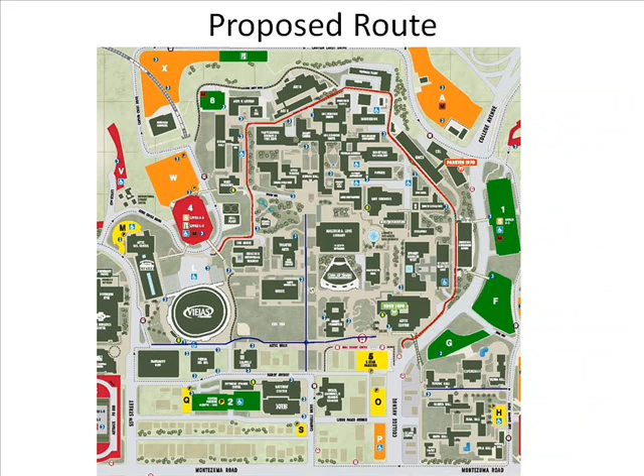The Highway Design Manual Class 2 bikeway is represented by the red route, where bicyclists and motorists will share the roadway, which goes through AZTEC Circle Drive, Avenue of Arts, and Scripps Terrace. The blue route represents the Highway Design Manual Class 1 bikeway, which will be exclusive to bicyclists and skateboarders only. This route is adjacent to the dorms and travels through AZTEC Walkway and Campanile Way.

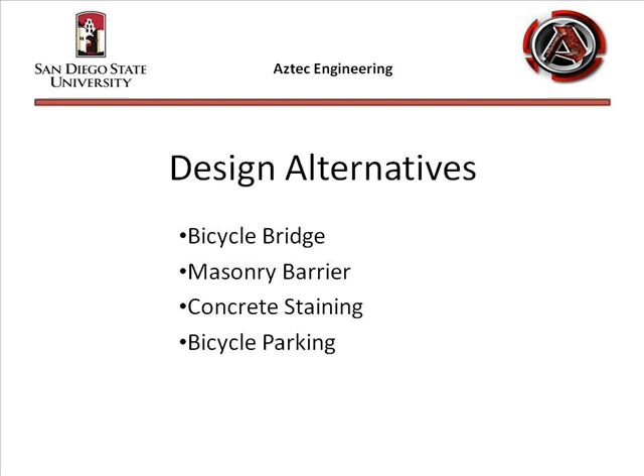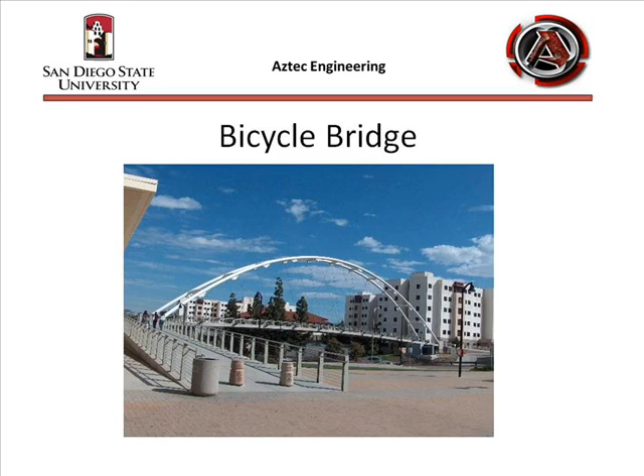Alternatives considered by the design team included a bicycle bridge, a masonry barrier, concrete staining, and additional bicycle parking. Presently, there is no safe and efficient manner for bicyclists living at the college dormitories to traverse College Avenue in order to get to campus. Therefore, a bridge designated for bicyclists was considered as a possible solution.

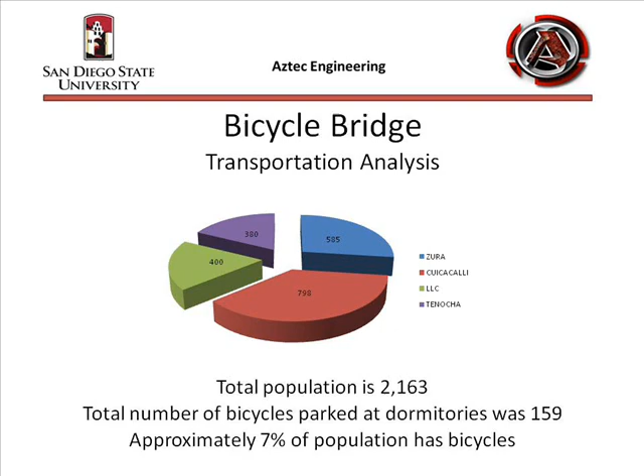Currently, the total population residing at the dormitories is approximately 2,163. A field count of the number of bicycles at the dorm determined the number of potential bicyclists to be approximately 159. That only accounts for approximately 7% of the total population at the dormitories.

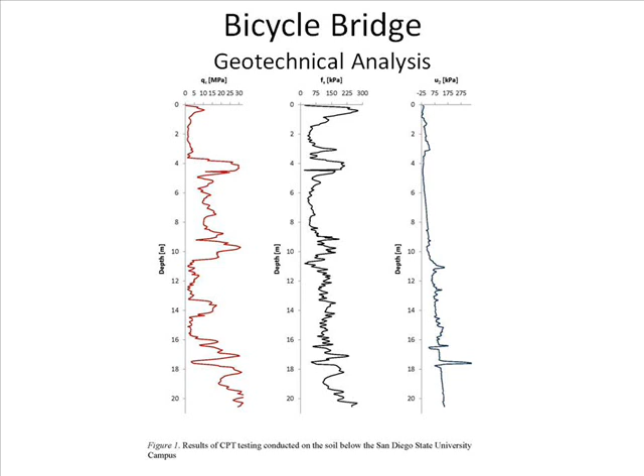Based upon soil data analysis provided to AZTEC Engineering by the school architect, which included the results of a CPT test, we were able to classify soil type for each layer. The following profile determined 9 different soil layers and the water table that is located at 3 meters below the surface.

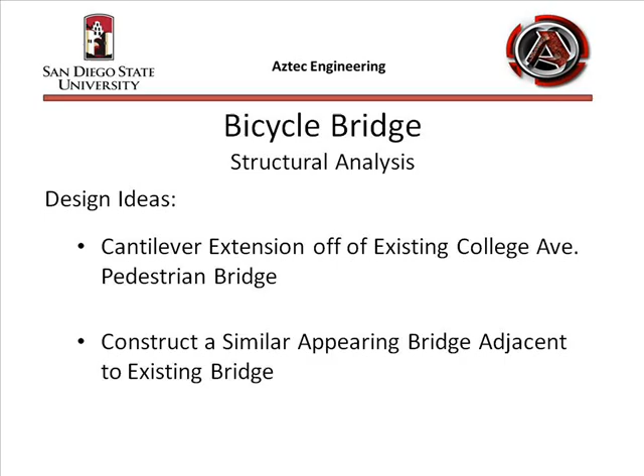Two design ideas considered by the design team included a cantilever extension off of the existing suspension bridge over College Avenue adjacent to the dormitories, and a second idea was to construct a separate but similar bridge exclusively for bicyclists adjacent to the existing suspension bridge.

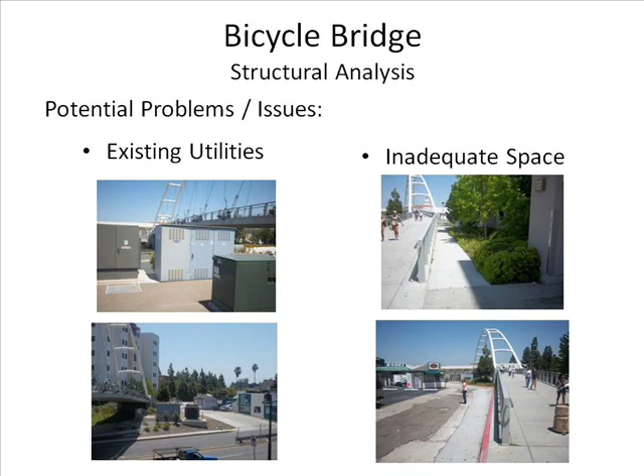Potential problems existed with both design ideas. There are 3 large electrical cabinets present that could make the construction of formwork quite difficult, and due to its proximity to Cuicacalli Dormitory and the alley behind KB Books, there is inadequate space for a parallel bridge. An additional issue were existing stairs that service the bridge.

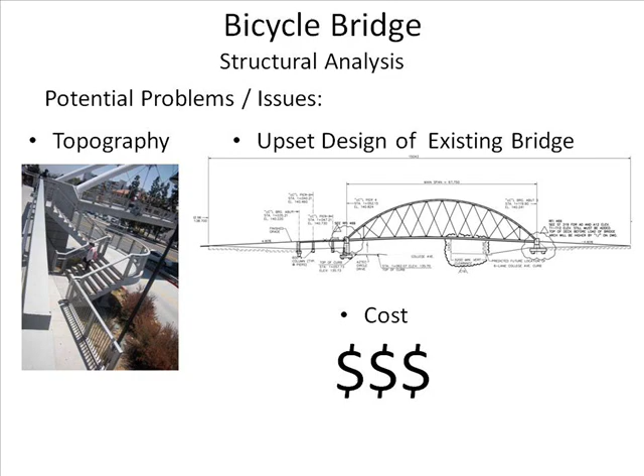Both designs would have required the demolition of these stairs. The cantilever idea would have resulted in upsetting the current design and loads for the existing bridge. Most of all, cost of a bridge for exclusive use by bicyclists was a concern. Due to the high cost of construction, low bicycle demand use, and problems with existing features, AZTEC Engineering made the decision to abandon the design.

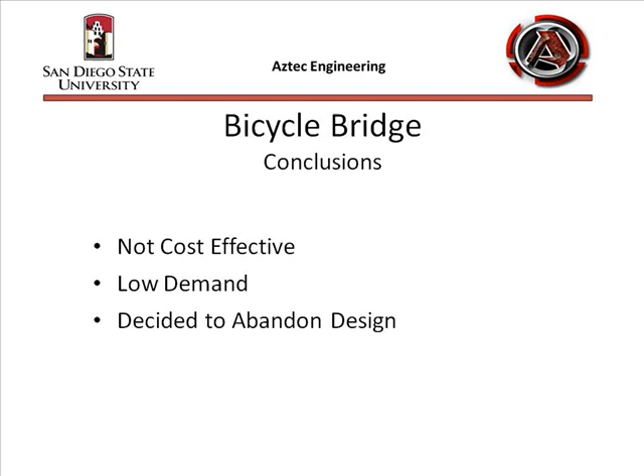The most important aspect of our design was to ensure the safety of all students, including pedestrians, bicyclists, and skateboarders. To achieve our goal of safety, AZTEC Engineering decided on a 4-foot-high masonry wall to separate pedestrians from bicyclists and skateboarders along Campanile Way.

The initial task completed by the design team was to determine the amount and makeup of the traffic flowing into the campus via Campanile Way. The purpose of the study was to determine the peak hour volumes and percentage of pedestrians, bicyclists, skateboarders, and vehicles entering Campanile Way. In order to complete this task, members of the team conducted surveys at various locations providing access to Campanile Way, which included AZTEC Walk, Open Air Theater, the Music Building, Hilltop Way, and the Love Library.

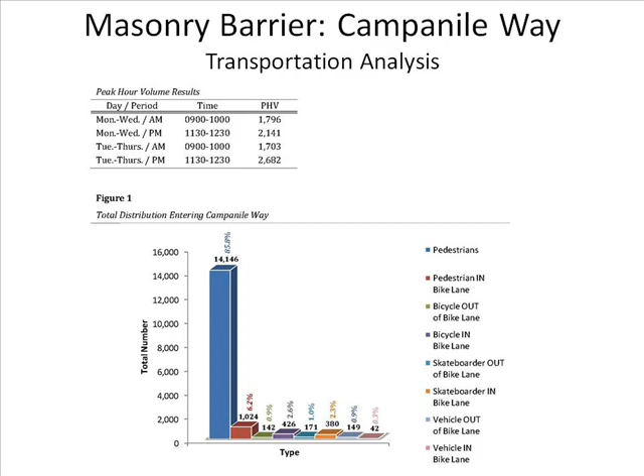The surveys were conducted between the hours of 0845 to 1500 hours. The results of the survey indicate that the majority of the traffic entering Campanile Way were pedestrians. On all days, pedestrians accounted for over 91% of all traffic, while bicyclists and skateboarders each accounted for over 3% of all traffic. Vehicles, which included carts, automobiles, and trucks, accounted for the remaining traffic. Nearly all the bicyclists and skateboarders and about 5% of the pedestrians were utilizing the existing bicycle lane.

According to code requirements, all footings must extend at least 12 inches into undisturbed natural soil or compacted soil which has been compacted to 90% density. Masonry units should be medium weight units with maximum shrinkage of 0.06%, F'(m) of 1500 psi. All head and bed joints should be 3/8 of an inch thick.

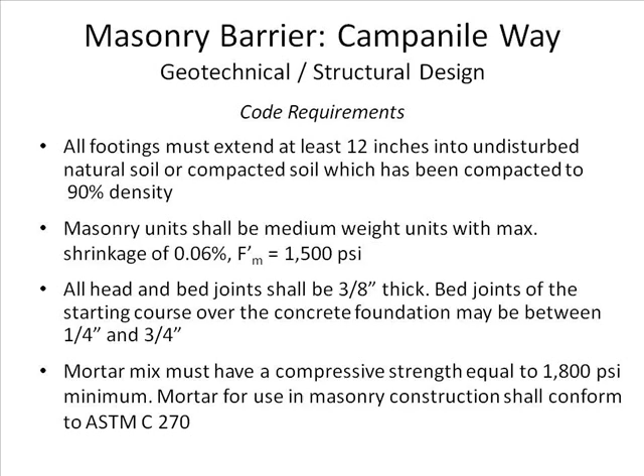Bed joints of the starting course over the concrete foundation may be between 1/4 to 3/4 of an inch. Mortar mix must have a compressive strength equal to 1800 psi minimum. Mortar for use in masonry construction should conform to ASTM C270. Grout must have a compressive strength equal to 2000 psi minimum.

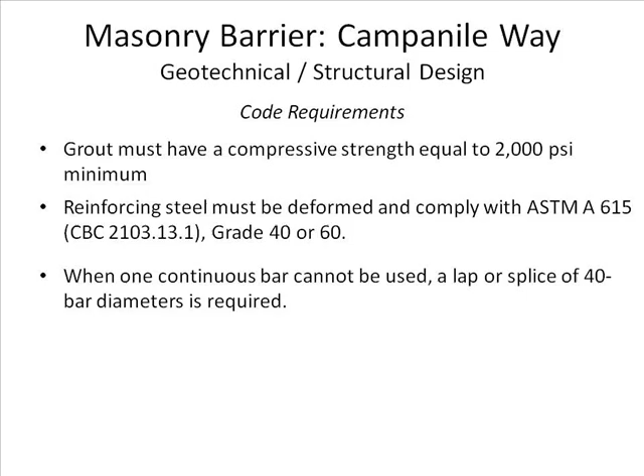Reinforcing steel must be deformed and comply with ASTM A615, grade 40 or 60. When one continuous bar cannot be used, a lap or splice of 40 bar diameters is required.

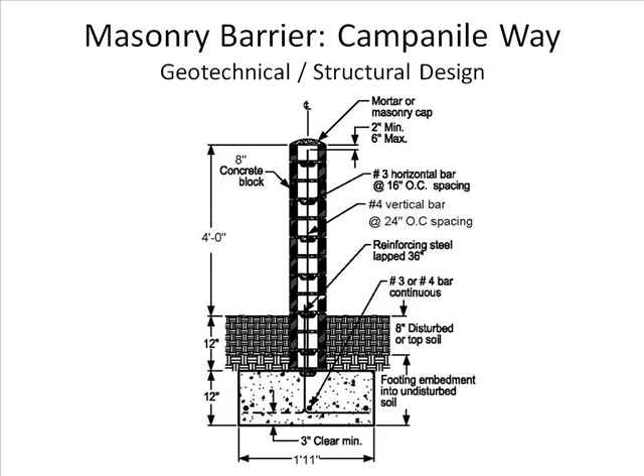The following detail was generated based upon the San Diego City Code, ASTM criteria and design calculations. Utilizing 8 inches fully grouted medium weight masonry block, the required horizontal reinforcement was number 3 bars at 16 inches on center. The vertical reinforcement required was number 4 bars at 24 inches on center.

The masonry wall designed to enclose the bicycle path will consist of a 4-foot-high wall on each side of the path along the Campanile Way route. The 625-foot wall is broken into 6 sections to allow for pedestrian traffic to cross the path.

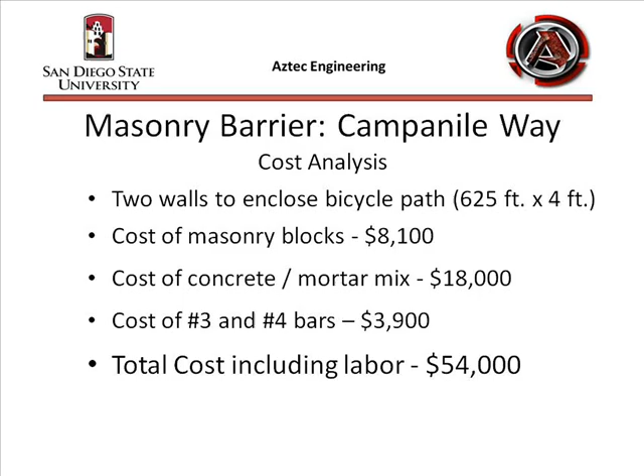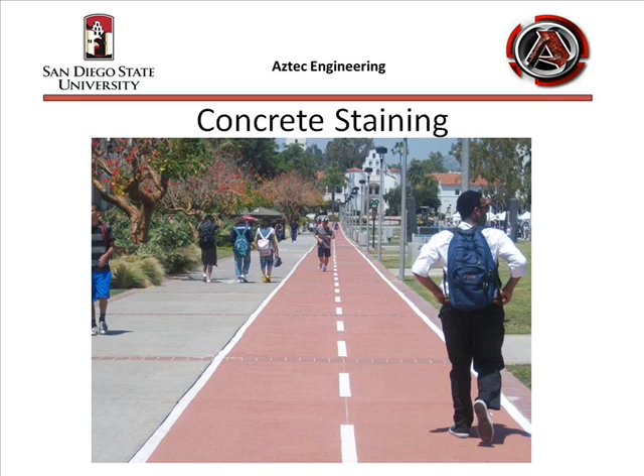To establish Class 1 bikeways, the design team determined the most economical and safe design would be to stain existing concrete, supplemented with striping and signs. The concrete staining design will be based off the criteria in the Highway Design Manual for Class 1 bikeways. The stain will be a water-based polymer stain in Baja Red.

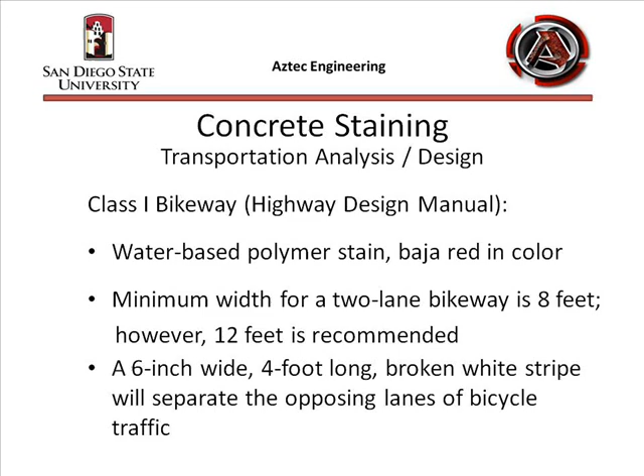There will be a minimum width for a 2-lane bikeway of 8 feet. However, 12 feet is recommended in the manual. A 6-inch wide by 4-foot long broken white stripe will separate the opposing lanes of bicycle traffic.

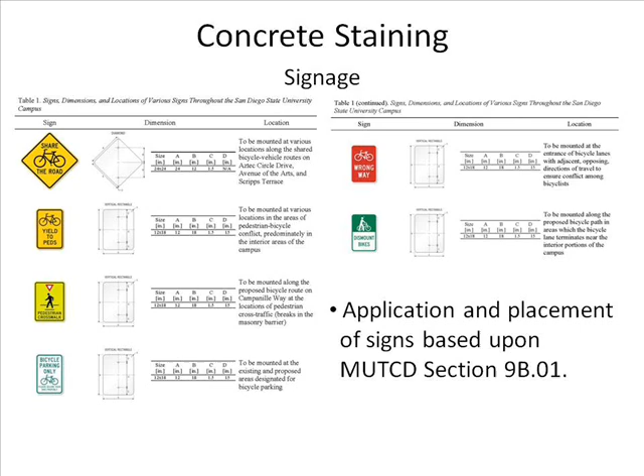Application and placement of signs were based upon the MUTCD Section 9B.01. For example, the Share the Road sign will be mounted at various locations along the shared bicycle vehicle routes on AZTEC Circle Drive, Avenue of the Arts, and Scripps Terrace.

The total area of the path to be stained is approximately 18,600 square feet. The white paint, Baja Red stain, and stain sealer accounts for a $2,200 material cost.

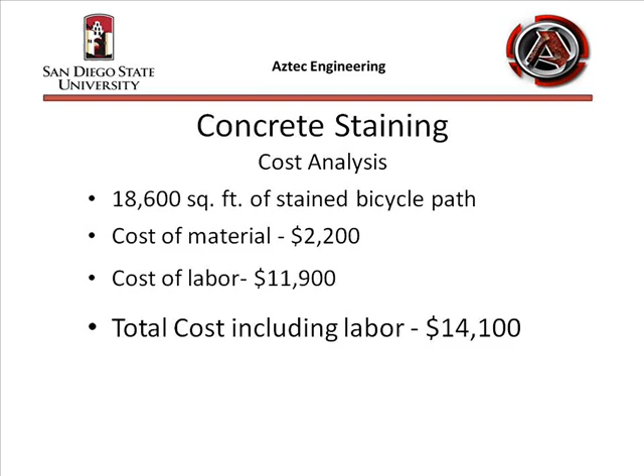The labor for applying the stains will require a 4-man crew and 9 full working days to allow for the pressure washing of the path, the application of the stain and sealer, and appropriate drying times. The cost for the 9 days of labor is $11,900, for a total concrete staining cost of $14,100.

One issue observed during observations made on campus was the lack of parking for bicyclists. The blue stars represent the locations of existing bicycle parking, which include inverted U's, waves, racks, and a bicycle barn. The red stars represent areas around the dormitories in which additional bicycle parking is needed.

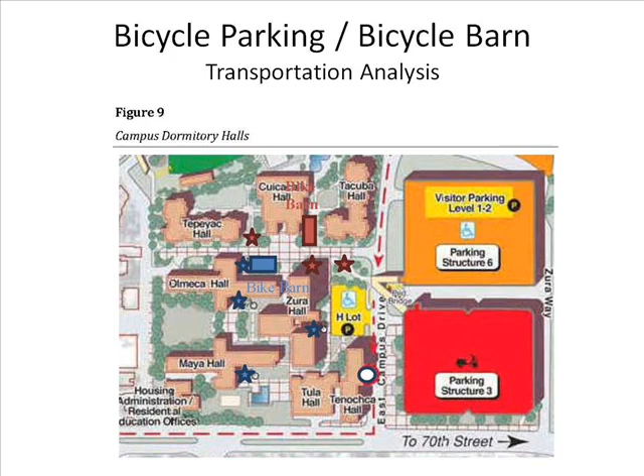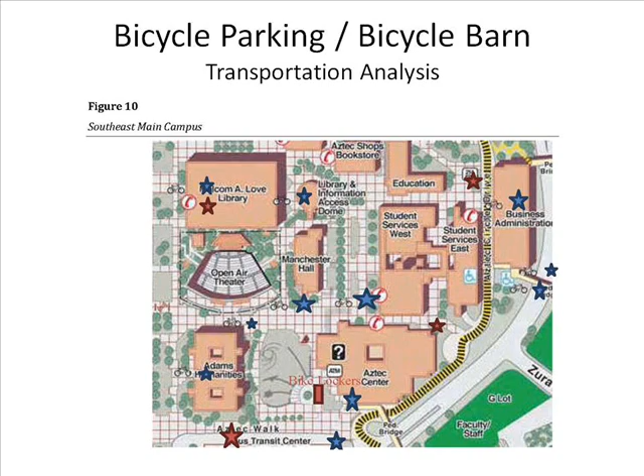The red rectangle represents the location of a proposed 160 capacity bicycle barn that will be free of charge to residents of the dormitories. The red rectangle depicted on the west side of AZTEC Center is the location of a proposed 12 bicycle lockers. Each locker is capable of holding 1 bicycle, and there will be a fee associated with the rental of the locker.

Depicted here are locations of the existing and proposed bicycle parking for the North Main campus.

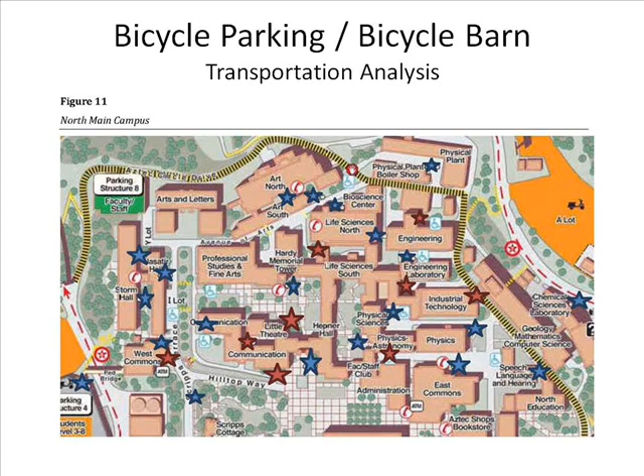One proposed type of bicycle parking is the inverted U. The criteria used in determining that the inverted U rack was most adequate is as follows.

It supports the frame of the bicycle and not just one wheel. It allows the frame and one wheel to be locked to the rack when both wheels are left on the bike. It allows the frame and both wheels to be locked to the rack if the front wheel is removed. It will allow the use of either a cable or U-shaped lock.

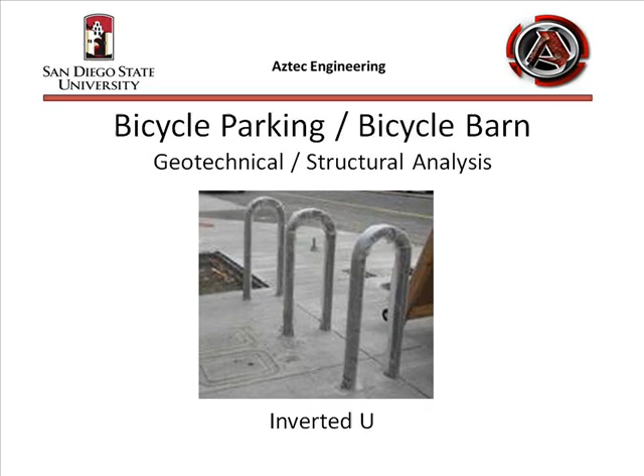It will be securely anchored to the ground. It will be usable by bikes with no kickstand. It will be usable by bikes with water bottle cages. And finally, it will be usable by a wide variety of sizes and types of bicycles.

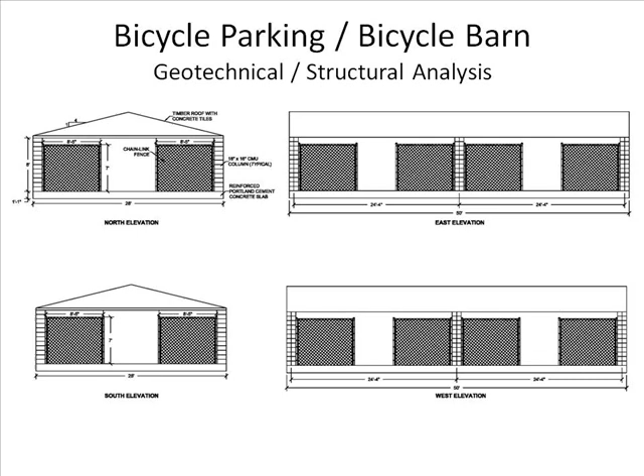The proposed 5-inch slab on-grade bicycle barn will be 28 feet by 50 feet and located adjacent to Queequeg Dormitory. The wood-framed roof truss will be supported by 6 8-foot-high masonry columns. To minimize cost and bearing load, chain-link fence was used as walls.

The following codes were adhered to when designing the bicycle barn. A minimum footing depth below natural and finished grade shall be 24 inches. Slab on grade and footings must be a monolithic pour. Footings reinforced with 4 number 4 continuous steel bars. 2 bars shall be placed within 4 inches of the top of the footing.

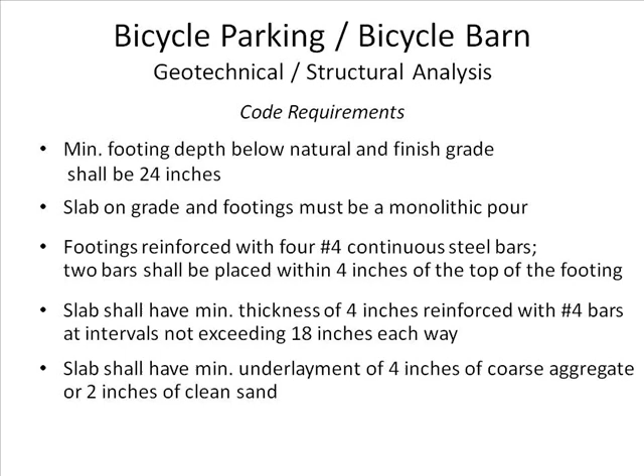Slab shall have a minimum thickness of 4 inches reinforced with number 4 bars at intervals not exceeding 18 inches in each way. Slab shall have minimum underlayment of 4 inches of coarse aggregate or 2 inches of clean sand. A 6 mil minimum moisture barrier is required beneath the slab underlayment and properly lapped at joints.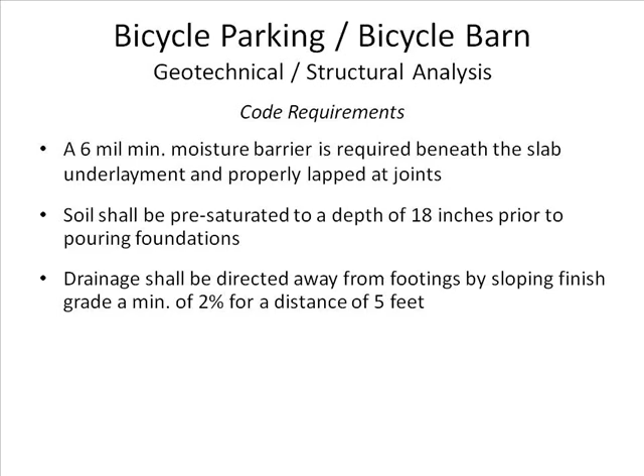Soil shall be pre-saturated to a depth of 18 inches prior to pouring foundations. Drainage shall be directed away from footings by sloping finished grade a minimum of 2% for a distance of 5 feet.

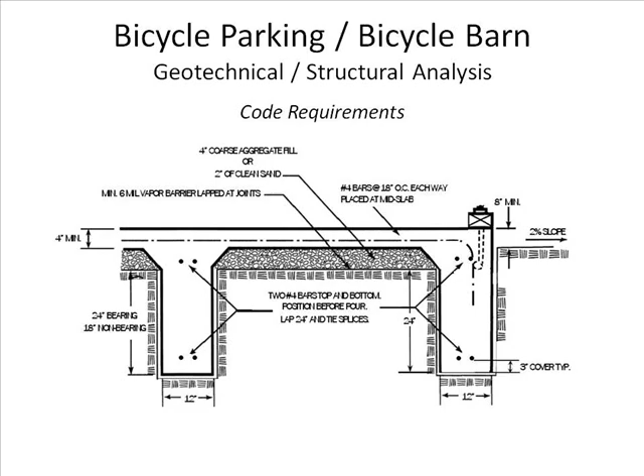The following detail depicts the design of the slab on grade for the bicycle barn. There will be 2 footings running longitudinally along the 50-foot length of the slab. The footings will be 1 foot by 1 foot and 2 feet deep to support the load from the columns and roof.

To account for the excess of bicycles to parking storage spaces, an additional 36 bicycle racks must be included across the campus. The cost of these additional racks is $2,630.

The 28-foot by 50-foot bicycle storage barn, built with 6 masonry block column supports, a brick facade, a wooden and galvanized steel panel roof, and chain link fencing and door, will have a materials cost of $15,750. Including labor for the construction of the storage barn and necessary bicycle racks, the total cost comes to approximately $40,000.

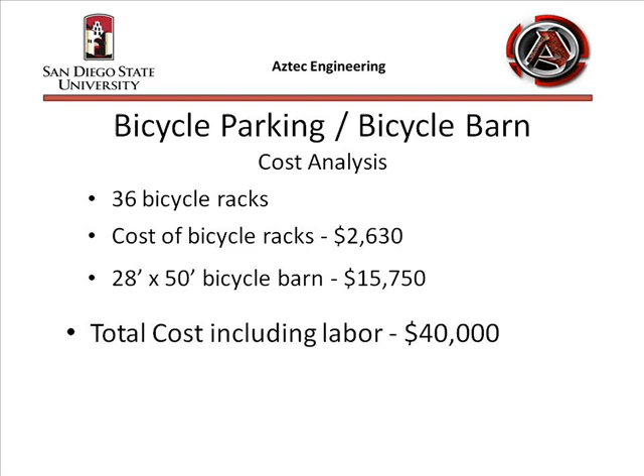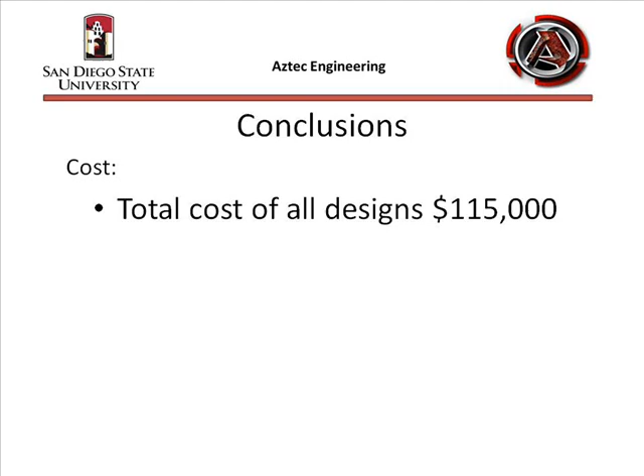In conclusion, the final design proposed by AZTEC Engineering includes the following: a Class 1 bikeway, a Class 2 bikeway, a masonry barrier, a bicycle barn, and additional bicycle racks. The total cost for the aforementioned designs has been calculated to be $115,000.

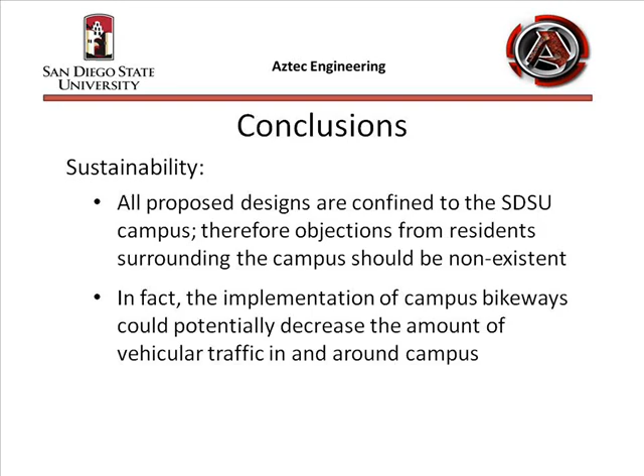One of the major components of our design was sustainability. All proposed designs are confined to the SDSU campus, and therefore objections from residents surrounding the campus should be non-existent. In fact, the implementation of campus bikeways could potentially decrease the amount of vehicular traffic in and around the campus.

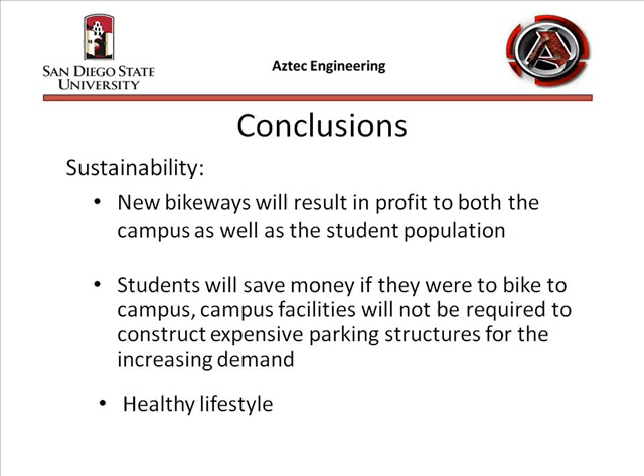New bikeways will result in a profit to both the campus as well as the student population. Students will save money if they were to bike to campus, and campus facilities will not be required to construct expensive parking structures for the increasing demand. A healthy lifestyle is also being encouraged by this form of transportation.

Environmentally friendly materials used during the construction of the proposed designs, as well as the transition from a vehicular form of transportation to one that utilizes bicycles, will result in a smaller carbon footprint.